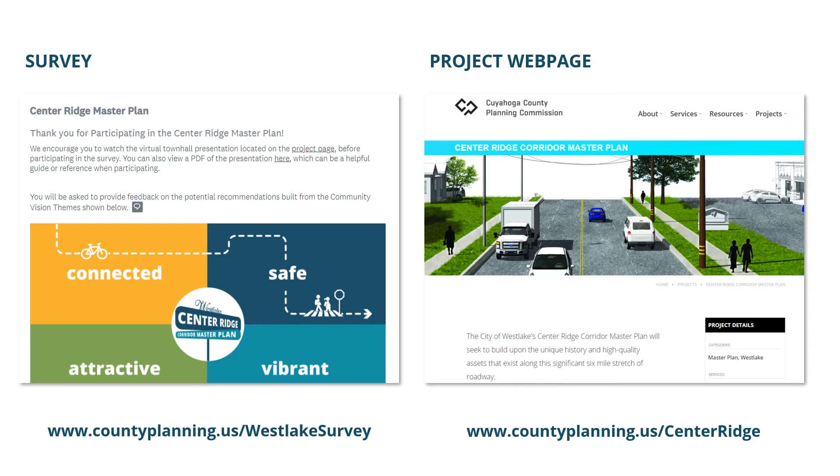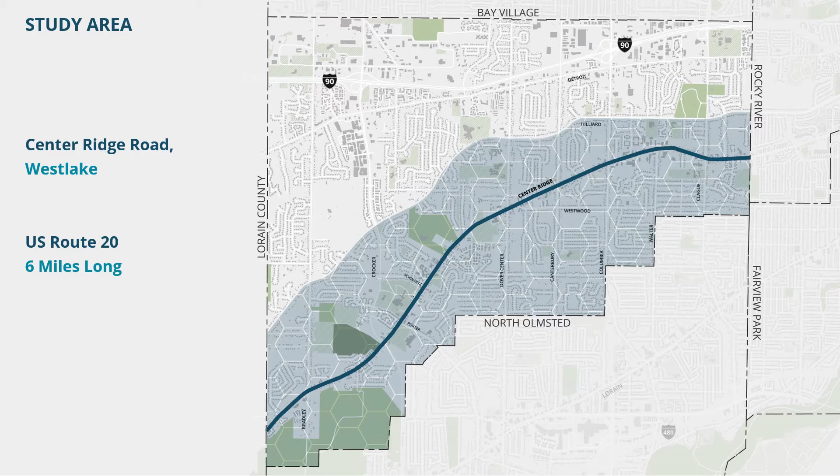The existing conditions stage focuses on a lot of data analysis and community engagement. For the data and analysis portion, we review a variety of topics from demographics, previous plans, land use patterns, and transportation patterns, all in an effort to better understand what's going on in Center Ridge Road and where the opportunities and challenges may exist.

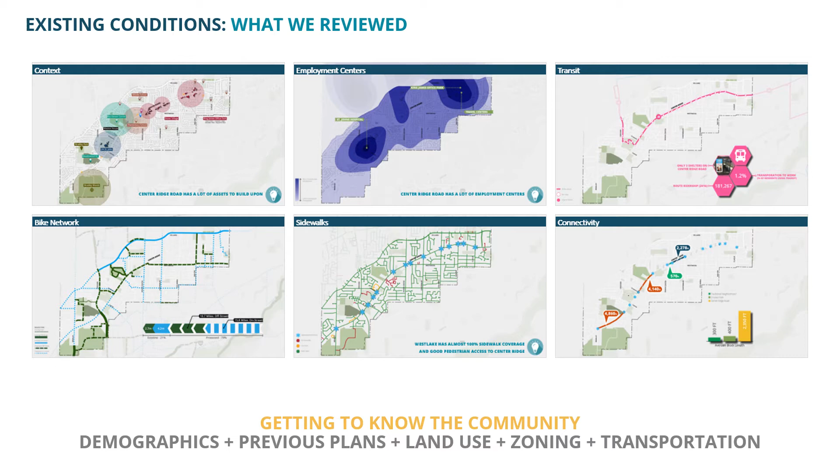Providing opportunities for community input is also one of the key reasons why developing a master plan is so important. Community engagement is a key element of the process and one of the many reasons we are with you today. Engagement opportunities in the Center Ridge Plan have come in the form of public meetings, online surveys, and other stakeholder meetings. During this process, we have had over 500 survey and meeting responses from participants and over 1,000 individual comments

on portions of the plan or comments with respect to what's going on along Center Ridge Road. What we've heard from residents in this outreach has varied, but people have responded by saying things like the road is narrow and feels unsafe, they don't feel safe letting their kids walk or bike on Center Ridge Road, or they would support longer car trips if Center Ridge was safer and more pedestrian friendly. Overall, our outreach indicated that Westlake residents support making improvements to Center Ridge Road in a variety of ways and locations.

Public input has highlighted that many people thought the roadway needed improvements that focused more on people and less on the car. Generally, roadway designs can be influenced by efforts to move cars as quickly as possible and reduce congestion, and we know that continuing to do that, or building or expanding streets to provide as much benefit to vehicles as possible, can negatively impact pedestrians or cyclists. But the inverse is also true: slight reductions in convenience to those traveling by car can produce large benefits to other users on the street.

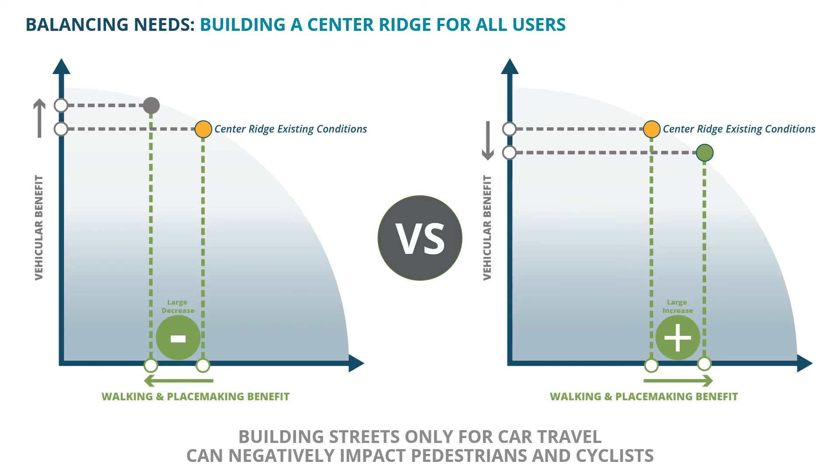Streets like Center Ridge Road serve several essential functions and should be designed to accommodate all those users and their needs. Constantly expanding the vehicular zone can really negatively impact all the different elements and space requirements to implement recommendations in the pedestrian zone, and really limit what or where certain items can be constructed or how they can be built.

So what we're trying to do with the Center Ridge Road Plan is ensure the proper amount of space is allocated to pedestrians and their needs, and utilize the right-of-way to its maximum benefit to create a safe and comfortable environment for all users, including those on the road and those off the road.

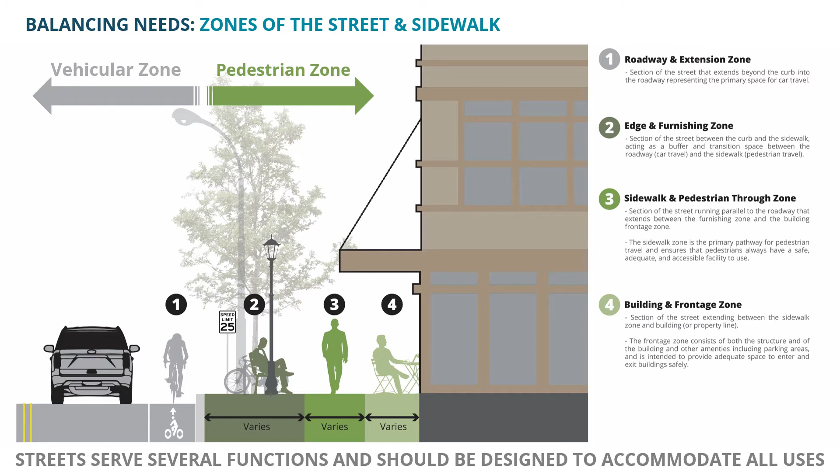As we mentioned earlier, all of these elements combine to create our community vision: current conditions analysis, feedback from public meetings and online surveys, and this desire to balance the needs of all users. Combining all those elements together, we can craft our vision for Center Ridge Road. From all of those inputs, we have created a vision that focuses on four key themes: making the street attractive, connected, safe, and vibrant.

When we discuss making the street more attractive, we're really talking about some of the simplest methods to start rebalancing our streets and effectively utilizing the proper public right-of-way by adding a variety of amenities and improvements to make the street feel safer and more welcoming to not only cars, but pedestrians and cyclists. Adding things like street trees and green infrastructure, public art, gateways, wayfinding and signage, site furniture, and other public amenities are all great methods to help make Center Ridge more attractive and welcoming for the user.

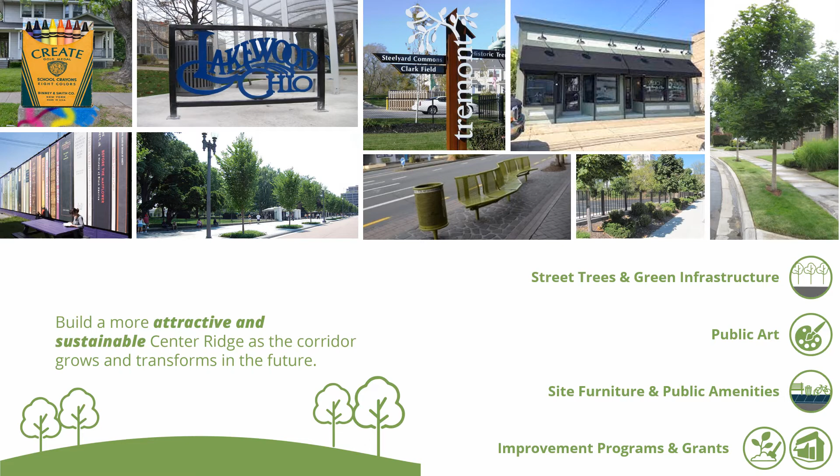Those recommendations can also go beyond the public right-of-way to include additional improvement programs and grants that could help improve storefronts, existing signage, or landscaping for businesses and other opportunities along the street. When we talk about connected, we're really talking about committing to improving pedestrian and bicycle connections to help foster healthier and equitable access to key amenities and destinations along the street.

We know there's a lot of great amenities and destinations on Center Ridge Road, so what we're trying to do is help create access to those destinations in a variety of ways by building multi-use trails identified in previous plans, adding additional bus shelters to improve the existing RTA route, adding bike and pedestrian connections to different neighborhoods and destinations like Bradley Woods, and expanding existing bike lanes and boulevards to create connections throughout the street and the neighborhoods directly adjacent to it.

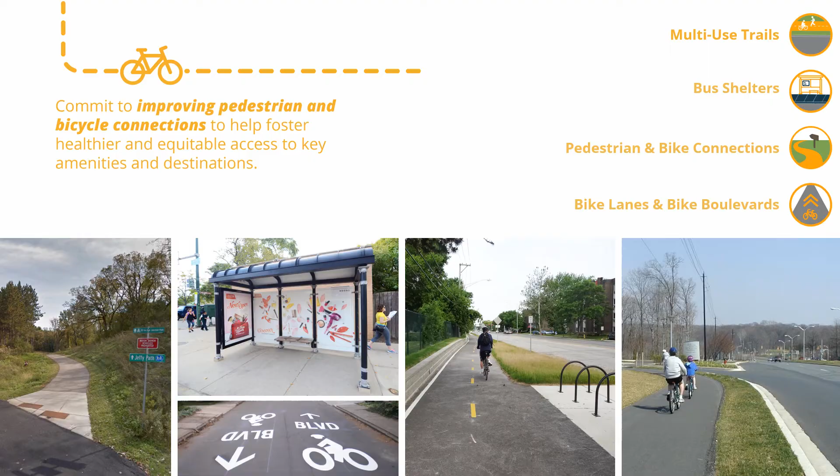We also want to focus on safety and support efforts that make Center Ridge safer and more inclusive to all users, regardless of transportation choice.

We know that residents identified safety as one of the main reasons they may not walk or bike. Hopefully some of the earlier recommendations can help with that, but we still want to identify design treatments that can improve driver awareness of people walking and biking, leading to fewer mistakes or mistakes with less deadly outcomes—things like high visibility markings and signage, reducing curb radii, or adding mid-block crossings and pedestrian islands.

One additional way to build a safe, connected, and active network is to start with children. In an earlier survey, many respondents told us they would not feel safe letting their children walk or bike on Center Ridge Road. A Safe Routes to School program can help implement many of the safety recommendations listed here or included in the plan, and can also help fund activities and events that promote walking and biking to school. When cities develop a Safe Routes to School program, the entire community becomes a better place for everyone to walk and bike.

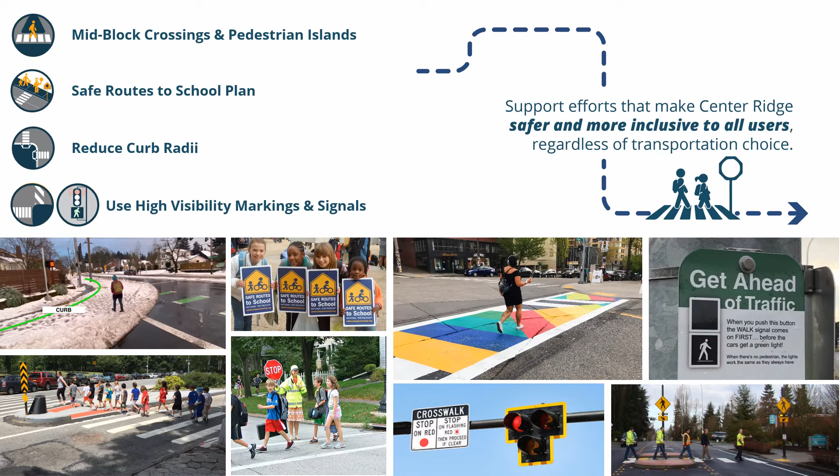Here I'm going to take a moment to talk in more detail about a few additional safety recommendations that could be implemented along Center Ridge Road.

One of the first recommendations is access management—reducing driveways or curb cuts along the street. Access management can improve safety, carrying capacity, and travel time for vehicular travel, and can also improve safety for pedestrians and cyclists using the sidewalk or any new multi-use trail, since reducing the number of driveways or access points reduces the potential conflict between cars and pedestrians as people pull in and out of different businesses or offices along the corridor.

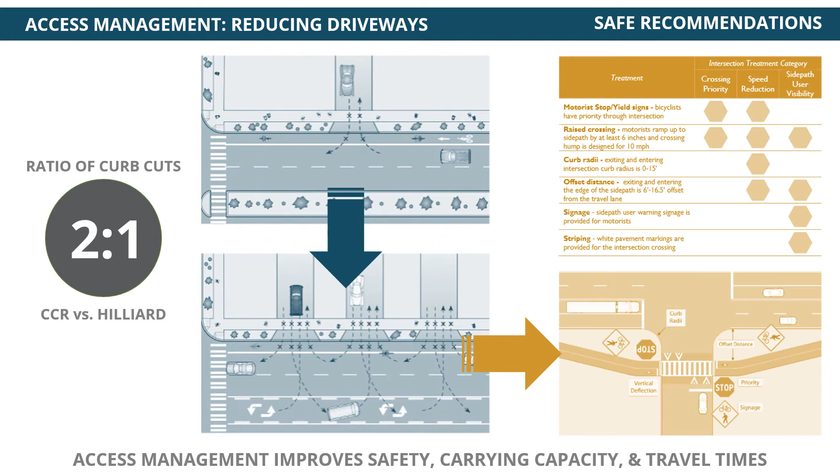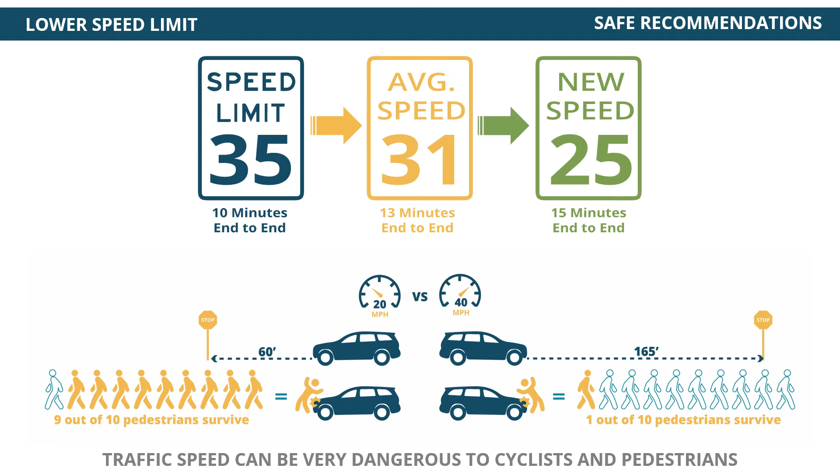One option to also consider is lowering speed limits. The posted speed limit on the street is 35 miles per hour, but the average speed people are driving is about 31 miles per hour across the entirety of Center Ridge Road. Designing roads for high speeds dramatically increases the likelihood that a person struck while walking will be killed. In fact, the actual likelihood of surviving a crash at any speed could be getting worse because of the rapid increase in vehicle size on the road today. Reducing the speed limit to 25, to bring it in line with the average travel speed on the corridor and tie it in with the existing 25-mile speed limit east of the corridor, could make the street much safer for both pedestrians and vehicular travel.

The last recommendation is this idea of road right-sizing. We heard a lot of comments from the public—people wanted the road widened, wanted turning lanes added, wanted easier left turns, or thought the roadway was too narrow or too tight. What we know is that streets designed for peak traffic flow often fail to provide a safe and attractive environment at other times of day. So, getting back to the idea of balancing users, we looked at a variety of roadway options and configurations to see how we could make the street safer for everyone and address these issues people had with the roadway.

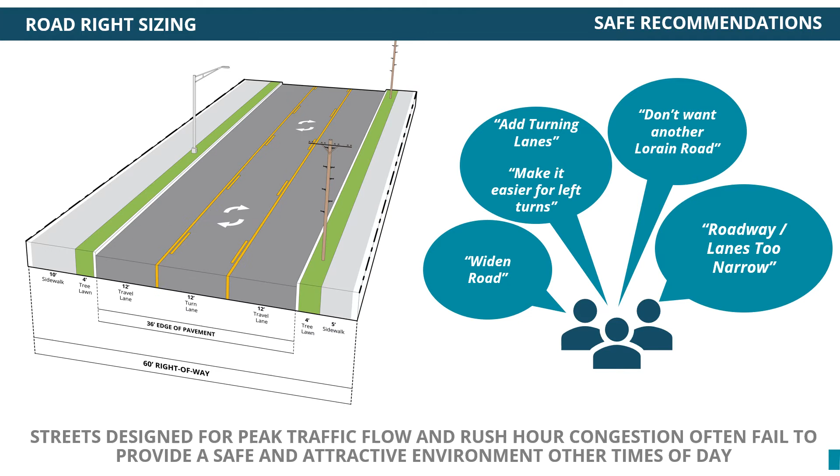Our recommendation was to implement, in certain locations along the road, a road diet. A road diet takes the existing 4-lane configuration and reduces it to one lane in each direction with a center turn lane—think of existing Detroit Road in Westlake as an example. Road diets are important because they help reduce conflict points all along the street, including those that cause the most frequent crashes that happen on Center Ridge Road.

Road diets can also improve operations, and they can really improve livability for pedestrians, cyclists, residents, and businesses, all without having to do major reconstruction of the street. In fact, the way Center Ridge Road is currently constructed, a road diet could be implemented in many locations with just restriping of the existing street by adding new paint. And what we've learned from our analysis and previous studies of traffic along Center Ridge Road is that implementing a road diet is not only feasible, but in a lot of locations could be the ideal situation to help improve the corridor.

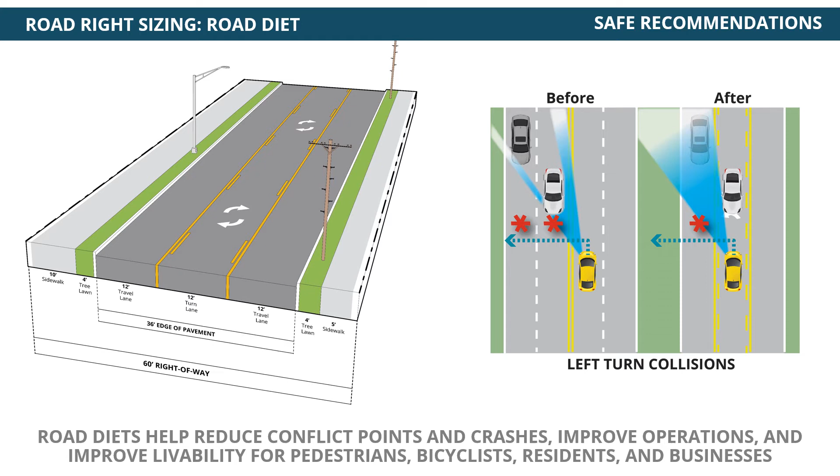I want to mention that a lot of these recommendations for improving safety along the street, whether it's utilizing a road diet, adding medians or pedestrian islands, adjusting the speed limit, or corridor access management, these are all federally approved safety countermeasures applied throughout the United States that show increases in safety for all users of the street.

So the last theme I want to talk about is vibrant. When we talk about vibrant, we're talking about assembling a mix of different residences and neighborhood businesses and other unique opportunities to create a unique sense of place and a really vibrant street within the city of Westlake. We're talking about aligning development and character to match people's vision for the street, using zoning code updates, corridor overlays, or other regulatory improvements to help create more walkable or mixed-use projects that are neighborhood scale and bring a lot of activity and vibrancy.

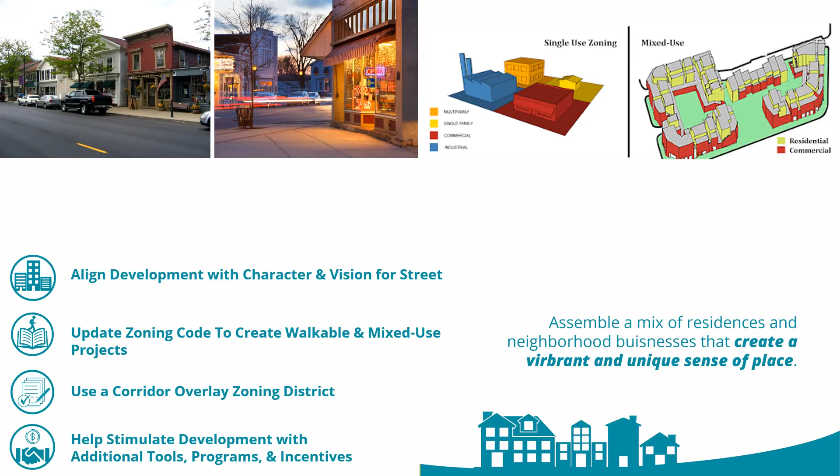To the corridor, we also want to look at other development programs or tools the city can utilize to help stimulate the type of development people want to see along the corridor. When we talk about these updates, we're talking about updating the zoning code and ensuring that regulation supports the community's vision and the desired development types.

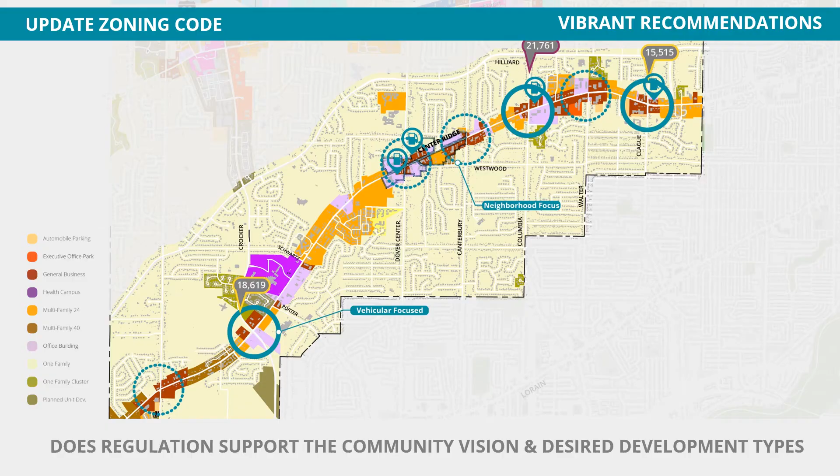Right now we have zoning code and regulations that are exactly the same along the whole 6-mile stretch of the corridor. In some locations the current zoning code may work fine, maybe it's a heavy vehicular focused intersection connecting to I-90. But in other locations we want that regulation adjusted to match the desire for neighborhood street retail, neighborhood developments, or walkable developments. So how can we update our zoning code to make that available to the community and the city of Westlake? What we know is that common regulatory barriers to redevelopment are zoning and design standards.

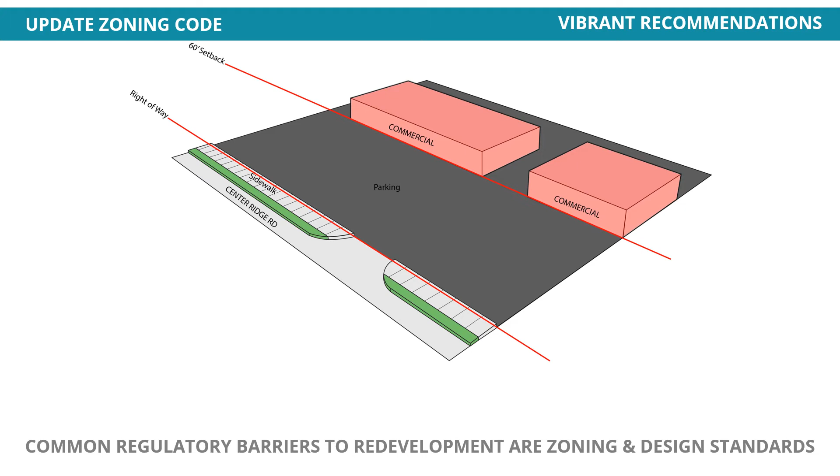To address that, we talk about potentially creating an overlay district, a Center Ridge Road corridor design overlay. What we can do is adjust the building setbacks, allowing buildings to be closer to the sidewalk, meaning they're inviting for people walking there. We can create the most beautiful sidewalk or trail along Center Ridge Road, but if the building is 50, 60, or 70 feet from that sidewalk, people may not want to walk to that destination.

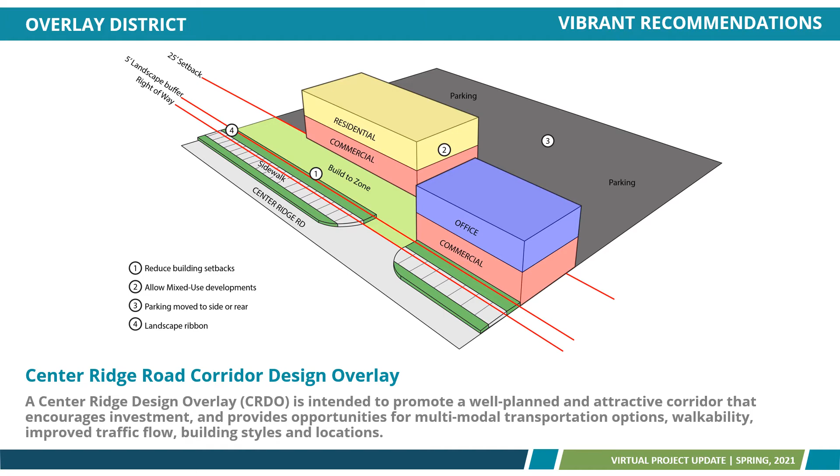We can allow mixed-use developments in addition to moving those buildings closer to the street, allowing for second or third floors of office space or residential spaces above the first floor commercial spaces. We can also move the parking to the side or rear of the building to create that nice urban form and street frontage of buildings with entrances, windows, and storefronts all along the street, with cars parked around the rear. This is really how we talk about updating the zoning to allow the development people want to see created in different locations along the Center Ridge Road corridor.

So that's a quick recap of all the different types of themes and recommendations we've included in the Center Ridge Corridor Plan.

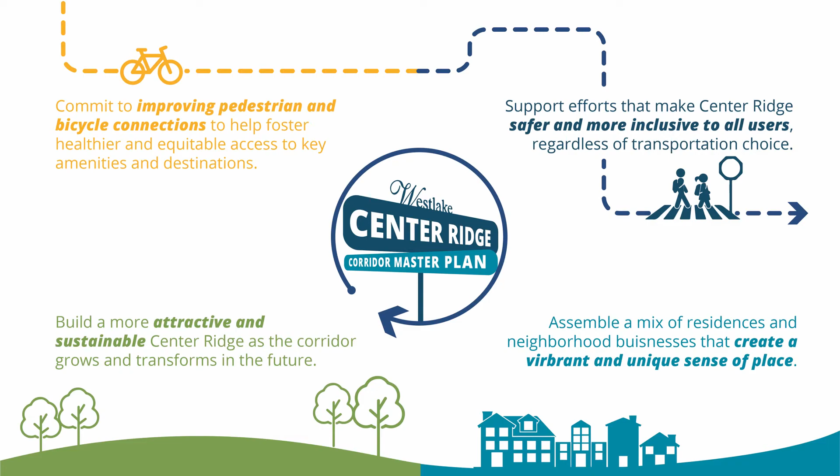Now I'll walk you through what those recommendations may look like when applied to Center Ridge Road. This gives you an example of the typical conditions of Center Ridge Road and why we think some of these recommendations make a lot of sense.

Right now on Center Ridge Road, we have 2 travel lanes in each direction, with space on each side for the sidewalk in different locations, and a lot of different areas where parking is up next to the street or next to the sidewalk, with buildings set back away from that sidewalk.

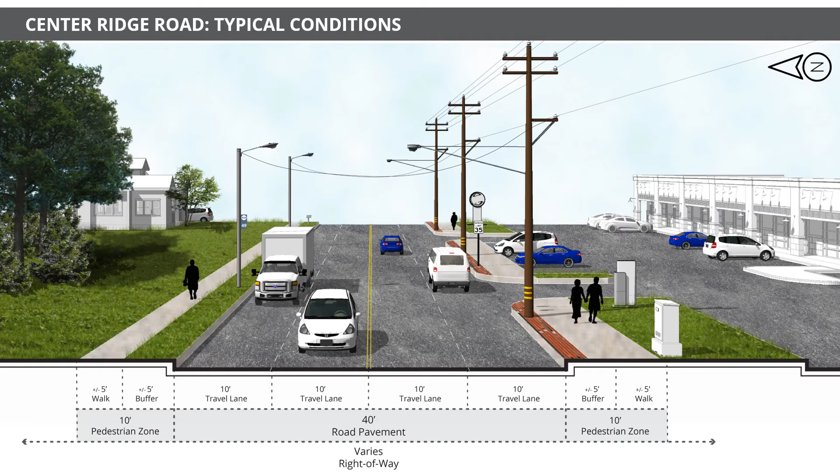So our first set of recommendations, and probably the early wins we talk about, are attractive recommendations. These are ideas like adding street trees on the northern side in a lot of different locations where you don't have the large power lines like you do on the southern edge, as well as adding additional site furniture.

The city could incorporate a bike parking program to encourage people to bike to different locations, adding things like trash cans, benches, and other elements, as well as a landscaping and signage improvement program.

The idea is to create consistency along the corridor in terms of the signage businesses use. Adding public art in different locations, in the form of murals, sculptures, or other elements, can create interest and excitement for people traveling through the corridor on foot or by car.

And then also implementing a storefront improvement program. A lot of residents mentioned in our feedback that they'd like to see existing buildings or spaces redeveloped, where they saw new businesses or new buildings popping up along the corridor.

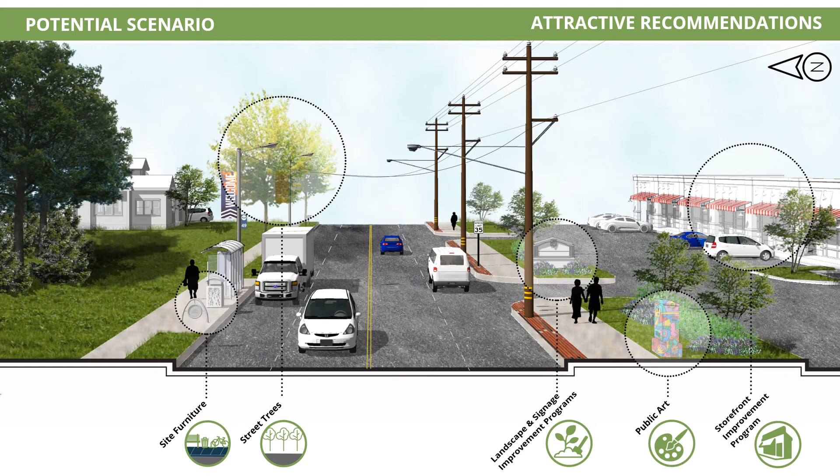So potentially utilizing a storefront improvement program as a way to recreate or revitalize some of those existing buildings along the street. These are the first steps when we talk about those early wins and ways we can really improve the corridor by reutilizing the existing right-of-way.

Our second set of recommendations focuses on connectivity. In addition to building attractiveness, we can start thinking about how to create spaces to make it better for people to walk and bike along the street. Residents identified using a trail as their more preferred option for bike travel, as opposed to bike lanes on the street.

So adding a multi-use path, as identified in the city's bike plan, has the potential to create a strong east-west connection along the length of Center Ridge Road, connecting people to a lot of great destinations along the corridor and providing an additional amenity to the existing sidewalk.

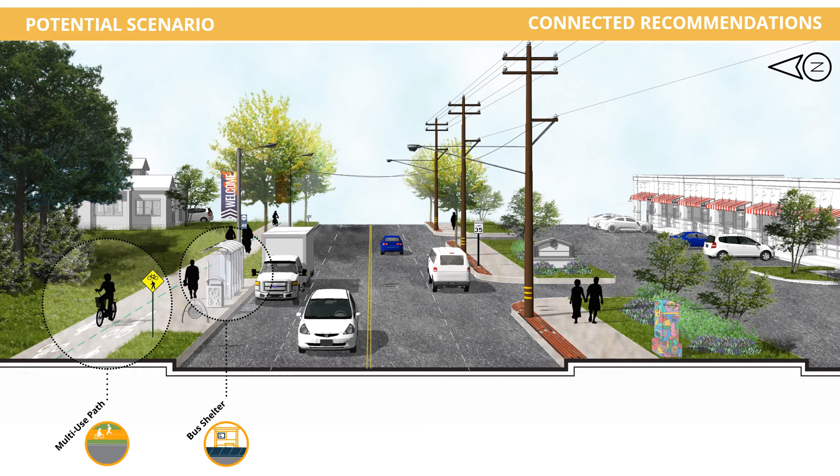We can also think about adding additional bus shelters to improve and enhance the existing RTA route, creating comfortable and safe transit waiting environments for people who use RTA to get to destinations along the corridor or to move throughout different parts of Westlake.

Building on those first two recommendations, we really want to focus on the idea of building safety and how we can make the streets safer for all users.

Thinking about reducing curb radii, making sure cars have to slow down as they pull into driveways, and utilizing access management by reducing the number of driveways on the corridor, so there aren't as many cars stopping and starting and waiting for people to pull out, reducing conflicts between cars and traffic.

And also reducing speeds, getting closer to what cars are actually driving on the roadway, but also not encouraging people to speed up really fast to try to get to 35 miles per hour, only to find someone in front of them slowing down to pull in and out of a driveway, creating those conflict points.

When we talked about these recommendations up to this point - attractive, connective, and safe - if you noticed, we haven't really done any reconfiguration of the roadway. We've focused on different ways to make the street better using the existing right-of-way or existing features on the street.

With the next set of recommendations, we start to look at the road right-sizing opportunity and how we can reconfigure the street to unlock additional safety, connected, and attractive recommendations. So the first piece of this is obviously doing the road diet.

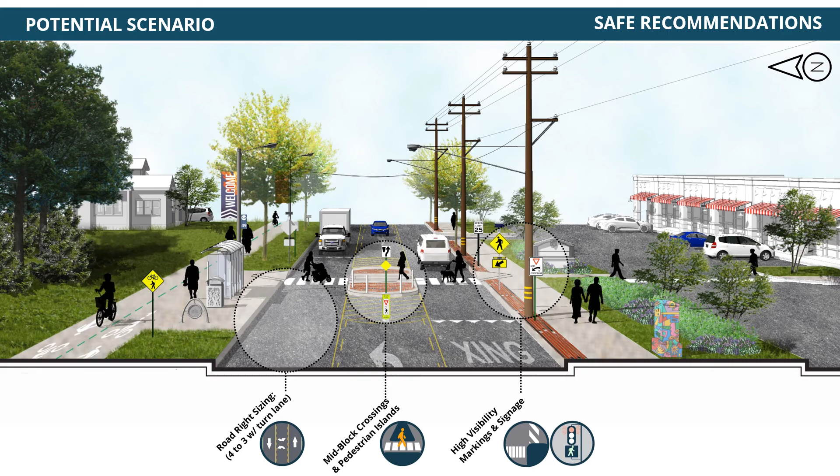The last part of this is utilizing high visibility markings and signage to increase awareness that this is a space for pedestrians, encouraging people to walk and bike along Center Ridge Road, either at intersections, mid-block crossings, or driveways. This keeps awareness between the pedestrian and the driver that this is a place for all users, and we want to reinforce those efforts.

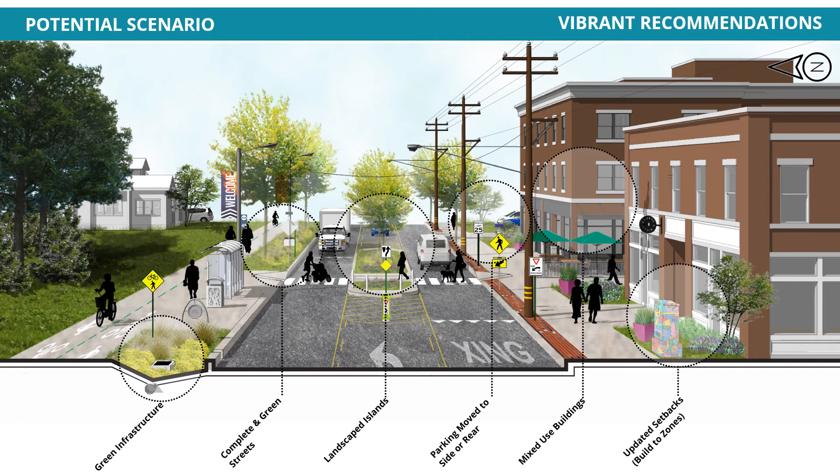The last set of recommendations for Center Ridge Road is creating a vibrant corridor. This gets into zoning and land use recommendations that match the infrastructure improvements we already talked about. We don't want to spend effort on infrastructure and connectivity improvements without zoning and land use recommendations that match up.

So this is where we talk about updating setbacks, bringing buildings closer to the street, and having entrances directly adjacent to the sidewalk. Allowing those buildings to be mixed use, adding additional stories, 2, 3, or 4 depending on location, and incorporating office or residential spaces above first floor retail.

Allowing parking to be on the side or rear of the building creates a nice frontage and streetscape along the corridor, with visual opportunities for people to see what businesses or opportunities are available. Using median islands for landscaping opportunities and green infrastructure, or completing green streets policies, to build a thriving and green environment.

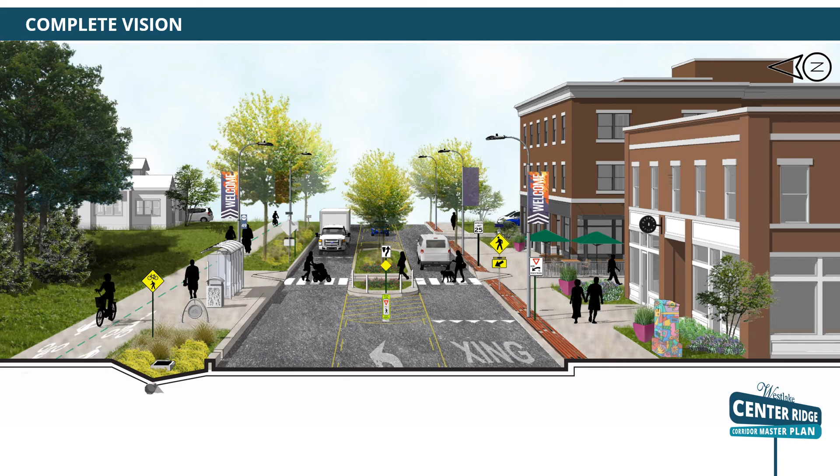This gives you an idea of what the corridor could look like, with all of these recommendations combined together, building off one another to create this complete vision for Center Ridge Road.

Now, we know that not every section of Center Ridge Road is going to look exactly like this or have all of these elements in one area, and we'll touch on that in a minute. But this gives an idea of what Center Ridge Road could look like in a specific location, and how these recommendations build off each other to create this complete vision and thriving, active street.

When we talk about those recommendations and where we're located, we mean the recommendations should reflect the corridor's uses and character. We talked about how zoning should update along the 6-mile stretch, and we think the recommendations should reflect what's happening in those different locations as well.

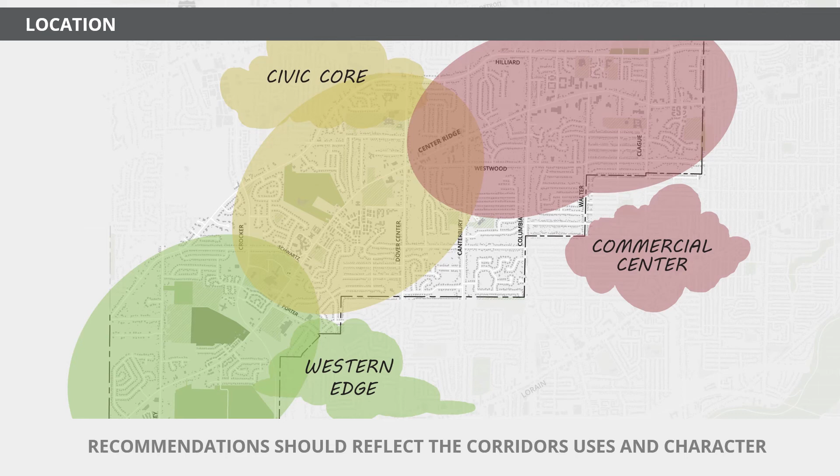We have the civic core with different community uses and developments east and west of that, so we want all of our recommendations to reflect the existing character and nature of the street. Our first set of recommendations focuses on that western edge, and you can see a lot of these recommendations here, some of which we've already touched on.

We can use this trail to reroute the existing US Bike Route 30 along this portion of Center Ridge Road, potentially adding a new trail north on Crocker Road to connect with the existing Crocker Park. There's a lot of opportunity here for improving safety, not only at existing intersections but adding potential mid-block crossings, and also a road diet to tie in with the existing road diet that currently happens on Center Ridge Road west of Bradley.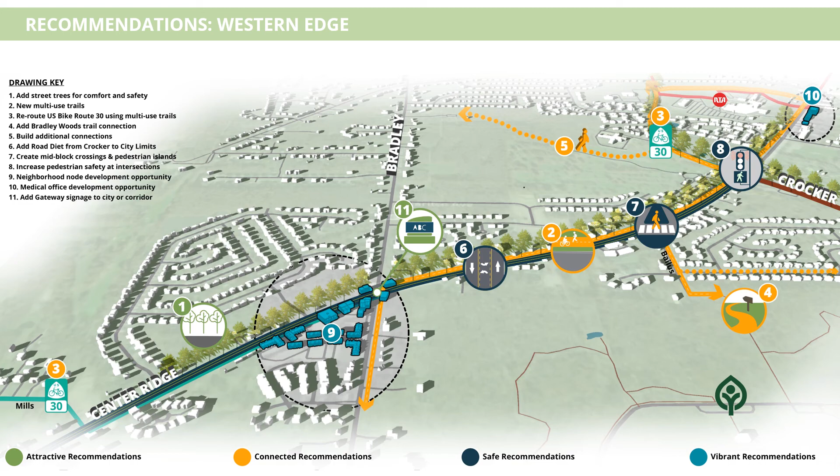We think there's also an opportunity to redevelop a neighborhood node at the corner of Bradley and Center Ridge, incorporating some of the zoning and redevelopment tools we already discussed earlier in the presentation, and potentially adding gateways, signage, or other elements to create an entrance not only into Westlake, but also into the Center Ridge Road corridor.

For the civic core, as mentioned, this is the heart of Center Ridge Road in a lot of ways. You've got the community center, the new elementary school, the public library, the post office, and also the Dover Village district.

We think this is an opportunity to add street trees in some locations, continue that multi-use trail, making connections to the community center, the library, and the school, and continuing the trail along Westwood East, which has a lot of space and opportunity for a multi-use trail. We could also add a new bus shelter near the school, library, or post office as an amenity people might want to access. This bus stop sits right in the middle of a 2-mile gap between shelters on the street, so it's a really good location for that.

Adding new connections to different locations around the community, and potentially continuing that road diet east of Dover, through Dover Village, as a way to help redevelop that area. This could be a location where we start the reduction of the speed limit to 25 miles per hour, from Dover east, to create a more vibrant, safer street, especially as people approach the school.

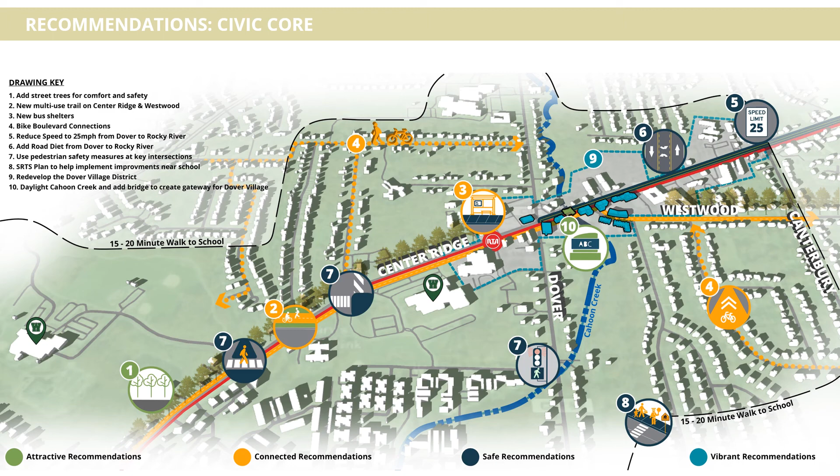Thinking about the school, this is really where we'd highlight the creation of a Safe Routes to School plan, and how that plan can be utilized to implement a lot of the recommendations in this area—whether crossing improvements, bike improvements, trail improvements, you name it—within 2 miles of a school. So if you're just 10, 15, or 20 minutes' walk away from the school, a lot of those recommendations and improvements can be implemented here.

Last but certainly not least is the commercial center. I won't spend too much time here, but we'd continue the trail on Westwood, continue the reduction in speed limit and road diet through this commercial center. This was a space where a lot of people said the roadway felt really narrow and the lanes were unsafe. There's a lot of opportunity here to redevelop along the street, maybe with expanded or new corporate offices, other office buildings, or mixed-use buildings along the corridor.

Continuing that trail north along Walter Boulevard to help connect up to Hilliard and maybe over to Clague Park, and also adding additional neighborhood connections and an additional gateway at Clague as people enter the corridor.

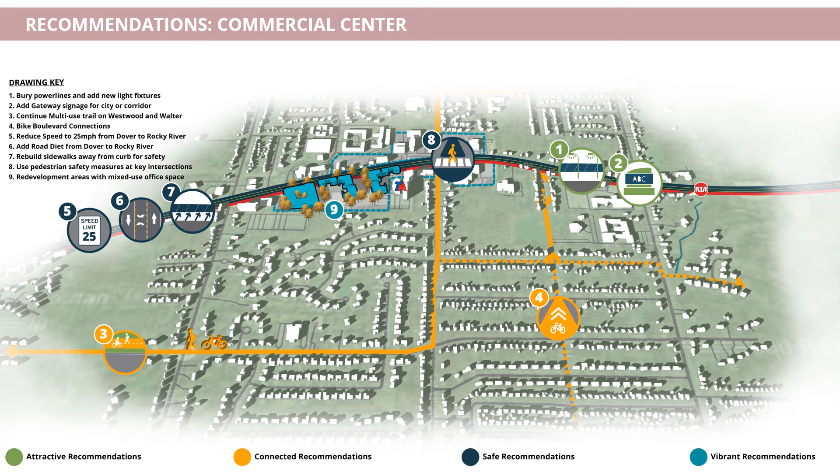So you can see how we identified what the recommendations are, what they look like, and how they could be implemented on the corridor—starting with the more attractive, straightforward items and building up to some of the more complex issues—and how these recommendations could be applied in different locations along the street.

So what we want from you is feedback on those ideas. We really want to hear what you think of some of these recommendations, so we encourage you to take a moment and take the survey on our project webpage, or use this link. It's really important to get that feedback—it gives us the opportunity to look at these recommendations, figure out the community's priorities, and decide where we want to make adjustments moving forward.